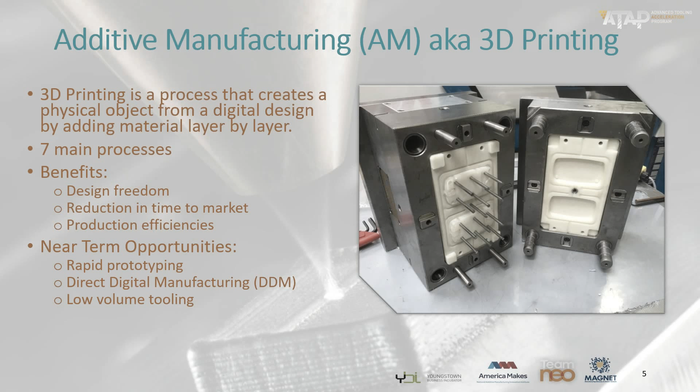It can also be a substantial reduction in time to market. It's very quick, you don't have to build tooling to do it. And it can also lead to production efficiencies if you use it in tooling. So we're going to get into it in the presentation that there's 3 ways to use it: making prototypes, making actual parts, and using it to do tooling.

These are the 7 processes of additive manufacturing. I'm not going to read those all to you, I expect you to have them memorized, there'll be a test afterwards. But just know that there are 7 completely different processes that constitute 3D printing or additive manufacturing. These are all very different ways to fabricate a part, but they're all the same thing I just said: you start with a digital design and you build a part up layer by layer.

Is there somewhere in this region where you can access all 7 of these additive processes? Was that bullet lost on here? Is it on the next slide? No, okay, it's lost. Yes, Youngstown State University is one of only 2 academic centers in the country that has all 7 of those processes in its additive manufacturing center. It's a great center of excellence in the region.

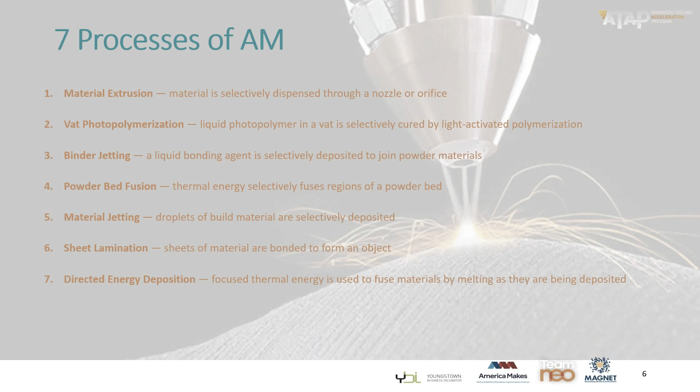Can I ask a question about those processes? So for each additive manufacturing project, you wouldn't necessarily use all 7 of these processes? No. You'd usually be using one of those to make and design a particular part, and they each have their own strengths. Material extrusion is very quick and straightforward. Vat polymerization makes more structurally sound parts. Some of them are oriented towards metals, so they all have their different uses.

So when you have additive manufacturing machines, like we know there are some machines at YBI, does a machine do only one of those? Just one of those, that's what I'm saying. It's not homogeneous, right? There's 7 completely different processes that are called 3D printing, and there'll probably be more in the future. These are the 7 that people have invented today.

So this slide I like because it lays out what I was just saying. You computer design something, using computer-aided design software to design a part. And then the software slices that into layers, like the piece of fruit we're looking at here - what is that, a pear? You slice it layer by layer, so the computer creates this image of it in slices. And then you print that part up from the bottom, a slice at a time.

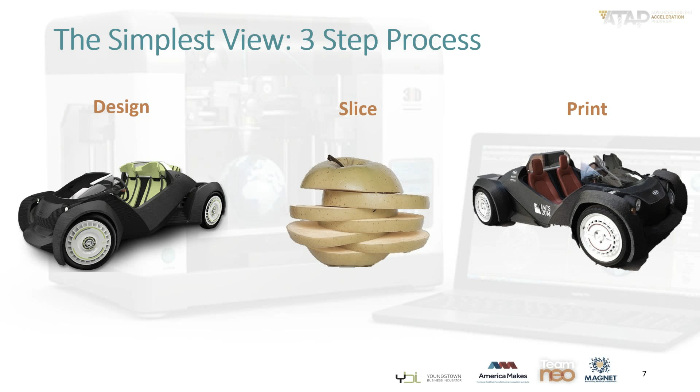So a video is worth more than 1,000 words. Let's run this video here to demonstrate that, on the next slide there. Not that one, no, yep, the one that was on - oh, that's it, yes.

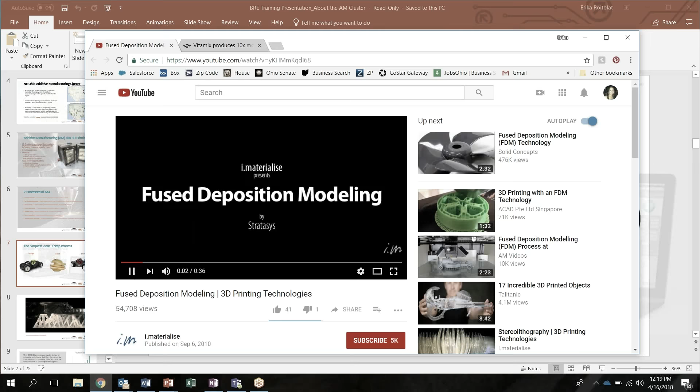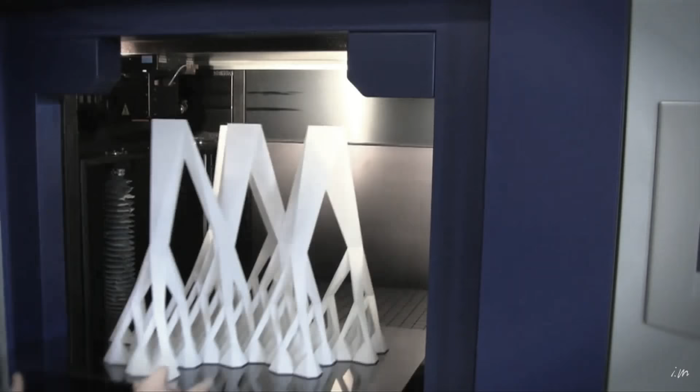So here you go, here's one of the processes: fused filament, fused deposition modeling. You see it's like a giant glue gun, it's going around layer by layer and extruding the melt of a plastic onto that and building it up layer by layer. And there you go, it's done - you've got this 3D part that you've just manufactured.

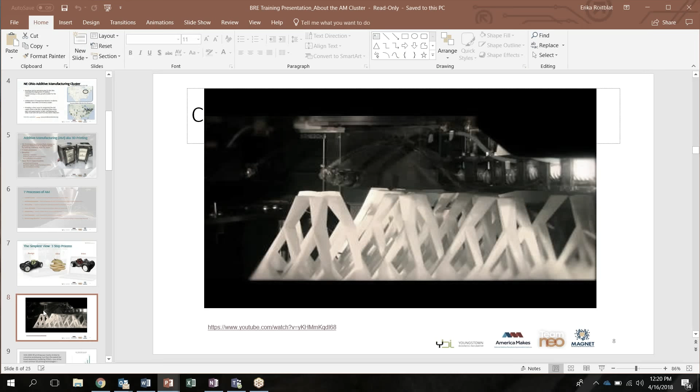In real time, how long would it have taken to make something like that? That would have taken hours, yeah, several hours. So that's one of those 7 processes - that one is fused deposition modeling.

And so the numbers of those have grown exponentially. But we don't care. Why? Are we here to support the growth of your kid making toys in his garage? No, we're here to support industry.

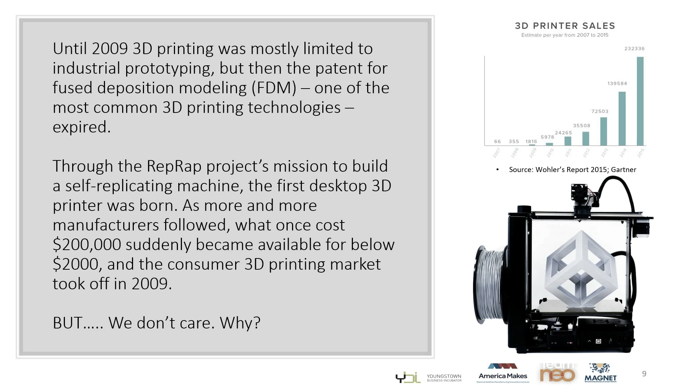So when you talk about 3D printing, be very clear that there's home use 3D printing where anybody can make a design and stick it in this machine and print out a little piece of a toy or a piece of jewelry at home. But that's not what we're supporting in this cluster. We're supporting industrial uses of 3D printing. So ignore all those little home machines, that's not what we're about.

So if you talk about industrial additive manufacturing, as I said earlier, let's reiterate, it's used in three ways, three purposes. One, you can make prototypes. Very important use, that was the original use of 3D printing. That was pretty much all of 3D printing's use in its early days because it's a wonderful prototyping tool.

You can be any manufacturer, designer, and have this little tool sitting on the desk in your engineering group, and you want to try to convince your customer that they should buy your design. So instead of showing them a drawing or a computer image, you can actually in a few hours just print one and show them your design, a real 3D actual prototype of what you want to make. Now obviously that's not the real shock absorber, it would be made out of other materials, but you can show them your design concept.

Very useful, we've found, with plastic injection molders and people fabricating parts like that where they need a tool to injection mold their stuff. Often our injection molders in our region will design that tool, not to be made here - most of them are made in China these days, unfortunately. But they'll design that tool and want to convince their customer to go with that design of the mold. So they want to show that design to the customer. They can print out a 3D prototype of the mold and show it to them.

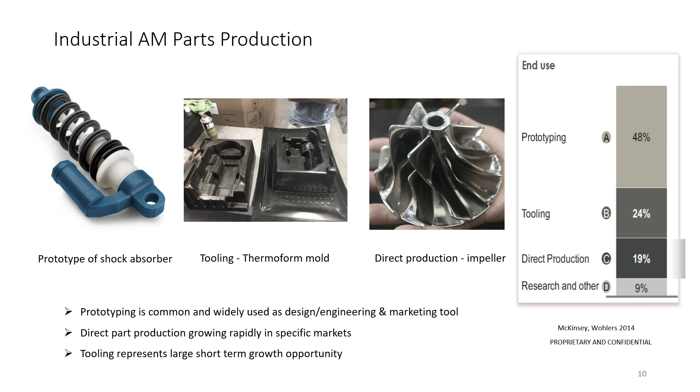So prototyping gives you speed to market. You can reduce the whole product development cycle time, both in terms of your ability to iterate and look at designs and show them to your customer and close that qualification cycle. You can iterate designs in less time. It's less expensive than traditional methods. You can do it in-house, or you can use a local service bureau to do it.

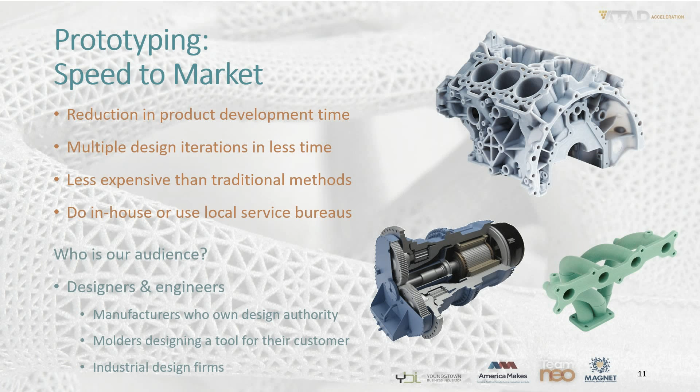So who's your audience if you're trying to talk to companies that you want to make sure they're using 3D printing for prototyping? Well, any manufacturer who owns design authority. If you're involved in design, or if you're an industrial design firm, and as I said earlier, even a molder that's making a tool for their customer - anybody that has design authority like that is somebody that should be using 3D printing for prototyping, whether they do it in-house or whether they pay somebody else to do it for them.

Secondly, direct digital manufacturing, making actual parts with 3D printing. This is the mind-blowing stuff that's going to transform manufacturing over the next decade or two decades, and it has already, because it changes the way an engineer or designer should think. Young engineers and designers coming out of college today are trained to think in design in 3D.

So holes don't have to be round. They used to have to be round because you had to machine it, or drill a hole with a tool. Well, if you're printing it layer by layer, it can be whatever shape you want it to be, and it can snake throughout a part. It doesn't have to look like what you think it had to look like. So it opens up all this design freedom.

Since you're making them one at a time, you can singulate, so you can design one for me and one for you and one for you. They don't have to all look the same. They can all be different.

And auto manufacturers are already taking advantage of this. You buy a new BMW, Audi, a bunch of cars now. Then when you go in to buy the car, they say, oh, well, these six parts on the interior, we're going to customize for you, Melinda. What color would you like this one? Would you like us to have your name on this plate on the door? Because they can just print them, and it's very inexpensive to make them individualized to the customer.

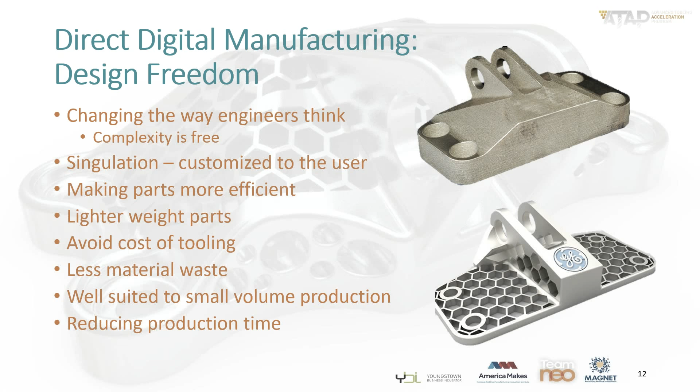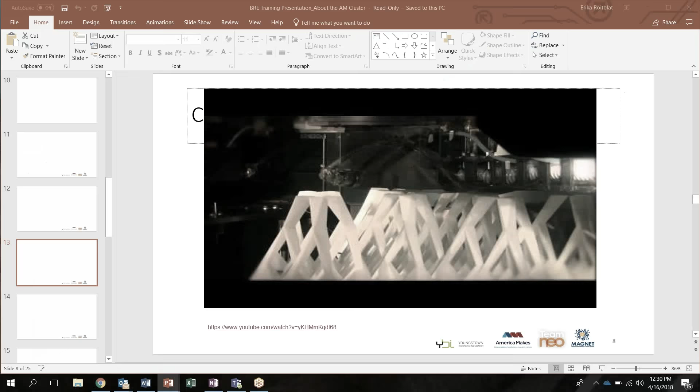But this isn't ideal for everything. If you're going to make millions of parts, all the same design, just crank out a million of them, 3D printing is not the right tool for you, because you can create that mold with injection molding or metal fabrication and make the part cheaper if you're making a million at one time, since you can amortize that $100,000 tool across a million parts. If you're making it in small volume, that's different. So small volume markets are the right markets.

That's healthcare, aerospace, the tooling aspects I was talking about, dental, jewelry. Automotive? No, because millions of parts are made there, so it's just a subset of automotive — large trucks or custom small-run automotive. If you're building a Lamborghini or an Aston Martin, they're using 3D printing to make parts because they're not making a million of one design, right?

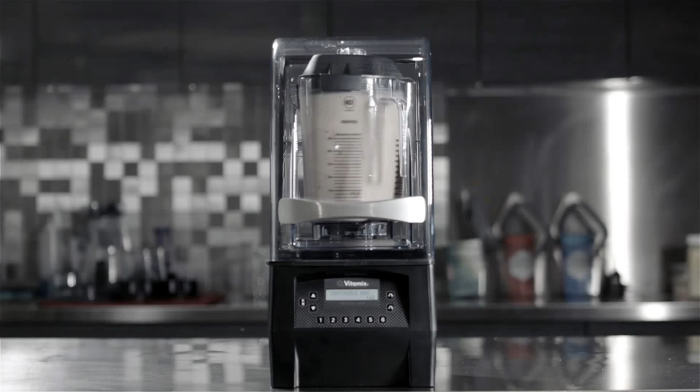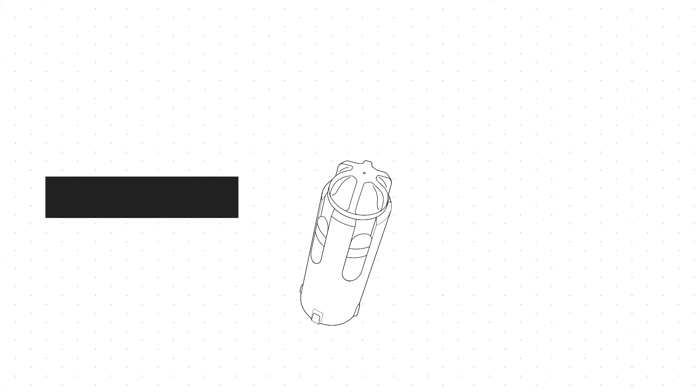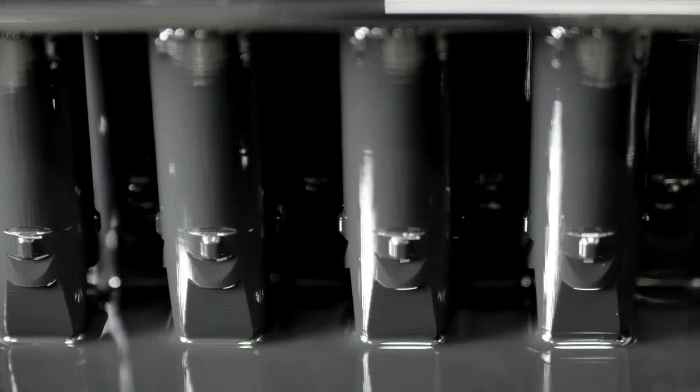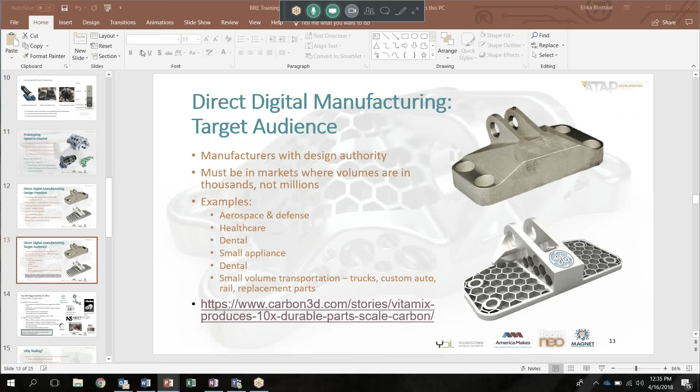This is the founder of Carbon, one of the fastest growing AM machine companies. The little things really impact so many aspects of our lives that we often overlook and don't fully appreciate. If you can design a product around the means of production, it puts the customer front and center. The nozzle from Vitamix is a perfect example of fusing design with manufacturability and engineering all into one. Ladies and gentlemen, I'll give you a demonstration of one of the most wonderful machines ever invented, the Vitamix machine. Vitamix was started 97 years ago by my great-grandfather with a vision to help people eat differently. Without help, you're a miserable failure. We decided if we're going to make a piece of equipment, we wanted it to last a long time, so we've never compromised on quality, and we won't. The nozzle is part of a system used to rinse out containers. We were struggling to produce a multi-piece design that would stand up to the pressures we were encountering. We have the opportunity to do something right simply because it's the right thing to do, and it's part of who we are. So we opened up a project to ask how we could redesign this. Maybe traditional manufacturing isn't enough. We recommended using the Carbon process as a start for the prototyping phase. This product, when made by injection molding, actually had to be made out of six parts. Making it a one-piece nozzle was really the only solution, and the only avenue we had was the Carbon process. When you make it out of one part, because we now can with digital light synthesis, you get a chance to dematerialize it — it's a third less mass. Vitamix started testing the prototypes and found the material was durable enough to meet or exceed the injection molding materials. It actually exceeded the quality standards of the product we were able to make with traditional manufacturing. You can't afford to go another day without a Vitamix machine. If you're going to believe in something that isn't yet possible, you have to rethink possible — it's the only way to get there. So the partnership with Carbon is very exciting for us because it's helping us rethink the possible every day. For the longest time we've been sending engineers to design rule classes — all the rules you have to follow because you can't do certain things. Once you can manufacture something differently, you can think about how those components interact with other components, and you get an entirely different outcome. It's about evolving the paradigm of engineering. Now we have a new tool in the toolbox that we're learning, exploring, evolving. This is a cultural revolution in how designers and engineers think. Once you go digital, you can't go back. It fundamentally changes how people collaborate and work. You don't have to have the constraints of manufacturability superimposed on the design. Instead of being curtailed on your idea because you couldn't make it, now you can make it, so you can let your imagination run wild. It changes everything. So that's Carbon, a Silicon Valley startup with upwards of $300 million in venture capital now, a lot of that from Google. Their success story is a Vitamix nozzle for Vitamix from Olmsted Falls, Ohio, manufactured by the Technology House in Streetsboro, Ohio, which is the leading carbon service bureau in the country.

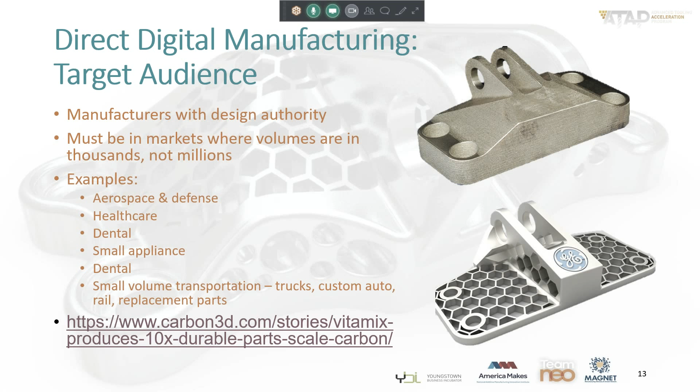They have six carbon machines now, five carbon machines just there. So this region is a leader in additive manufacturing technology.

So there's lots of things you can do. These are examples in our region of companies doing direct part production between Parker and GE Aerospace in Cincinnati and AFRL, a lot of aerospace. Arconic is huge in this respect in terms of metals used in AM production in aerospace.

Parker has an additive manufacturing innovation center in Macedonia that they're using to roll out additive manufacturing in a big way throughout all their operating units because they understand the power of it for many, many uses.

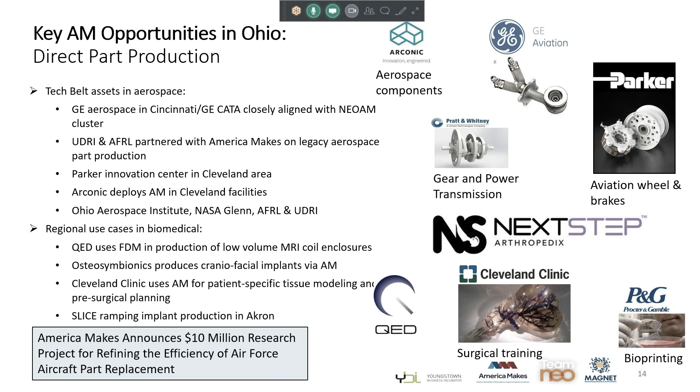And then in biomedical, you've got a number of really interesting uses. The Cleveland Clinic uses it for patient-specific tissue modeling. QED works with the Technology House to make housings for their MRI coils. Slice is a great startup in Akron making metal hip and joint implants.

So you have a lot of activity in direct part production in Northeast Ohio. Third use, right? That was prototyping, direct part production. Tooling is the third use. This is significant across the manufacturing spectrum, because this is not something where you have to get approval from your aerospace customer to use 3D printing to make a part for them. This is just making stuff to use on your manufacturing floor, so you don't usually need qualification for that.

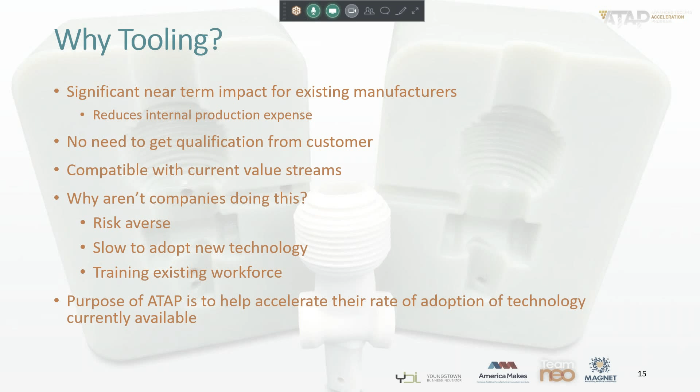And it's compatible with your existing stream. So why aren't companies doing that? Well, they don't necessarily understand the technology, so they're risk averse, they don't know how to use it, and they may need to train some existing workforce. So I'm going to tell you about a great program, ATAP, that helps them understand how to do that.

Who would be the targets you would want to talk to about this? First of all, plastic processors like injection molders, thermoformers, extruders, where they can use it for tooling and jigs and fixtures in their factories. Metal fabricators doing milling, machining, and turning traditional metal fabrication. Tool and die shops where it can be used for pattern making. A special subset, metal casting, is a big success story in Northeast Ohio with a company called Humtown Products.

America Makes taught them how to use it to 3D print sand casting molds, and they're the leading company in the country in terms of printing sand casting molds using a machine that comes out of Southwest PA, Southeast Ohio, called a company called ExOne that makes the machine. And then manufacturers in general, like the examples I gave earlier, of a fixture that carries something down the line or in quality. That applies to any manufacturer, really.

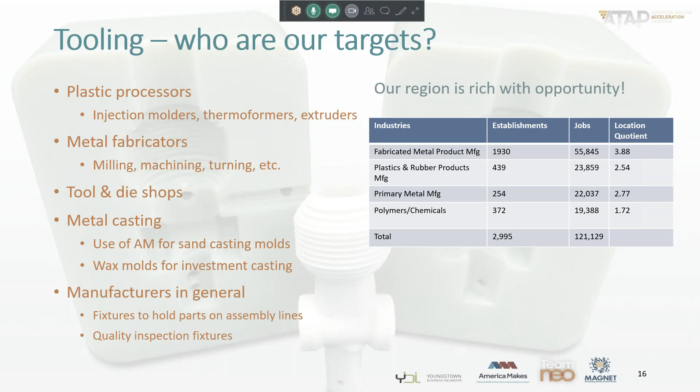But look at these numbers. Just know this about Ohio: these are numbers about the number of establishments of these kinds of companies in the region and our location quotient. So you see there's thousands of target companies just in our region. It's very easy to identify companies that can save money in this way.

So if we go to the next slide, that's a start. Sorry. These are some of the examples we identified in doing the case study examples, the roadmap, and then subsequently with ATAP. So Honda down in Marysville uses additive all over their factories now in terms of tooling. The automotive industry has adopted this in a big way. Ford, Honda, Toyota, all of them are using additive for tooling and jigs.

Like if they're setting up a new line and they want to try it out and need to run something down to get the line lined out, they'll print a bunch of the fixtures and parts and carriers and everything to try it out, and then use those as setup tools to run parts down a line, and in quality on that. There's a company in Akron—I'll tell you about them in the success stories a little later on.

But blow molding, tooling, fixtures. There's a window profile company down in the Youngstown area. So you make window profiles—you extrude these pieces of plastic, and then you need to line them up to weld them to make a nice square window. So you need a fixture to hold them all square, but each one could be a different design if you're making different models of windows. You could machine those fixtures out of a piece of steel and waste a bunch of steel in the process and spend a lot of time doing machining.

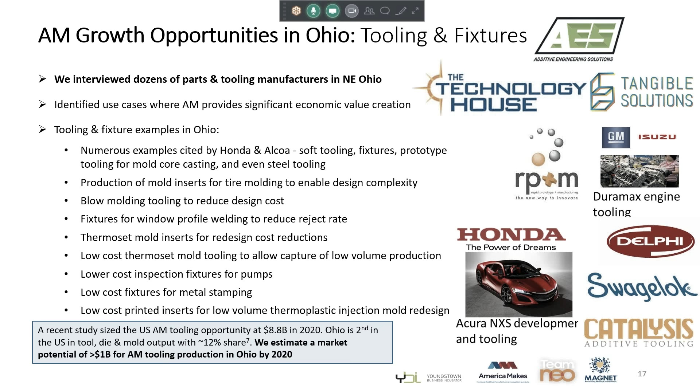You can just print that fixture for a fraction of the cost. So they do - we taught them how to do that. Mold inserts, inspection fixtures for pumps - there's just endless examples of how to use additive in tooling.

And we think for Ohio it's really significant. There's so many tool makers and plastic and metal processors here. So we have this great state-funded program that we have to take full use of. It's called ATAP, Advanced Tooling Acceleration Program.

For that audience I was just talking about, those manufacturers, we have these amazing AM technology experts in the region. Dave Pearson at Magnet has 25 years of experience in additive manufacturing - he's a known guru, teaching additive manufacturing at military installations around the country, as well as at Cleveland State and Tri-C. Then down at America Makes you have all these great experts. At YSU you've got professors like Darrell Wallace, available through this program, an industry-renowned 30-year additive expert.

So in this program, we bring one of those world-class experts into your factory. They walk the floor with your people and identify use cases where you could save money, drop more profit to the bottom line by deploying additive for tooling on your plant floor.

Once they've identified a use case, so that you don't have to spend money trying it out, we de-risk it for you - we identify a local service bureau that can print that part for you, and the grant pays for that first job to be printed, up to $5,000. So you identify some piece of tooling on your floor that instead of making it traditionally, you could make it with additive. They help you design that, get it printed by an outside bureau, put it into use in your factory, usually at no cost to you, because most of these don't even cost anywhere near $5,000 to implement.

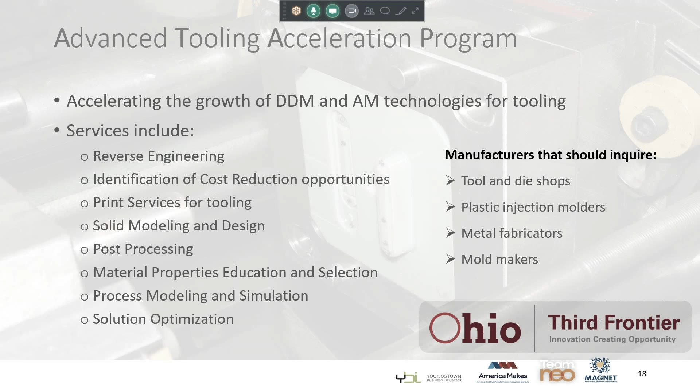Yeah, it was going to have a sunset in June, but the state gave us an extension to use the rest of the funds. So it's going to run at least through the third quarter, maybe through the end of the year, but it's something we need to take advantage of now. When it ends, in our tooling working group, we're going to assemble those local vendors into a supply chain collaborative and continue to provide this kind of service, but without the state subsidy on it. So now is the time to take advantage of it.

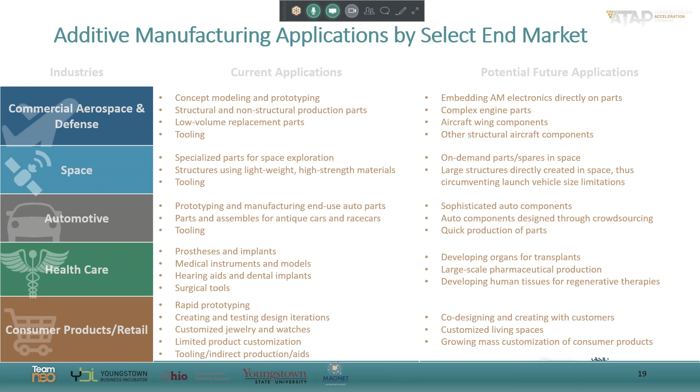I won't belabor this slide - it's just showing you, as we talked before, the key markets for additive manufacturing and the way in which additive is used there. I'm not going to go through all of that, that's just some background for you.

The last opportunity to make sure you're aware of with additive in our region - as you know, our region is incredibly rich in polymer materials companies. There's 10 or 12 multi-billion-dollar companies here, and a lot of others. And they haven't come into additive manufacturing and utilized their assets to develop materials for additive so much because there were some barriers - closed systems, patent restrictions put up by some of the machine companies. But a lot of that is running out - Stratasys' core patents ran out, and there's a lot more open machines on the market, so a lot of polymer companies are jumping into additive manufacturing now.

Large companies like DSM, Owens Corning and BASF are jumping in with lines they've developed specifically for additive manufacturing. In our region, A. Schulman and PolyOne have been in it on a tolling basis. Lubrizol just announced recently that they're entering the market. They're going to be one of HP's partners to develop materials for HP's machines.

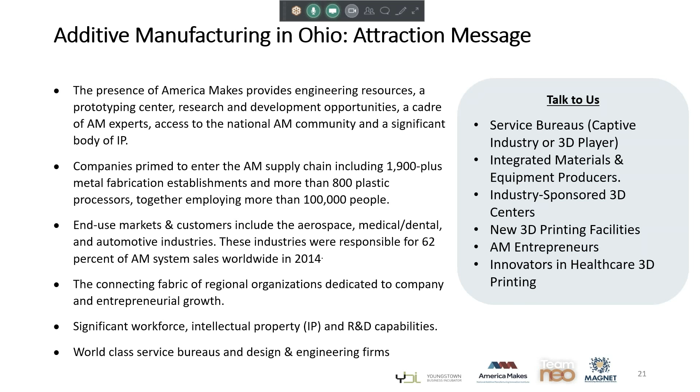And you've got some world-class firms here, two of the best, probably two of the top five service bureaus in the country that are not owned by some big conglomerate are here in the region: The Technology House in Streetsboro and RP Plus M in Avon Lake.